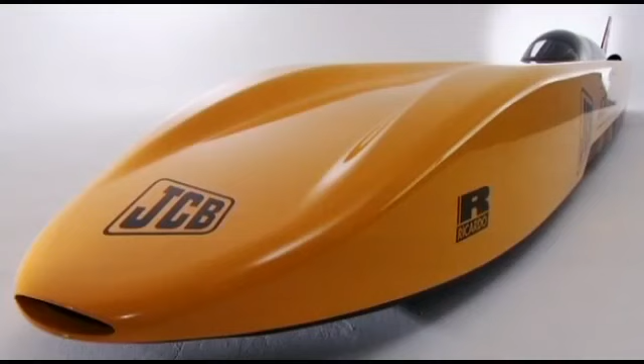Mathematicians are used to dealing with limits, but industrial vehicle manufacturer JCB wanted to push the limits to the extreme. They wanted to take their classic digger and turn it into the world's fastest diesel car. It was a seemingly impossible assignment, but a dedicated team of men and women, including engineering consultants from Ricardo, achieved astonishing success. This is the story of how maths made it happen.

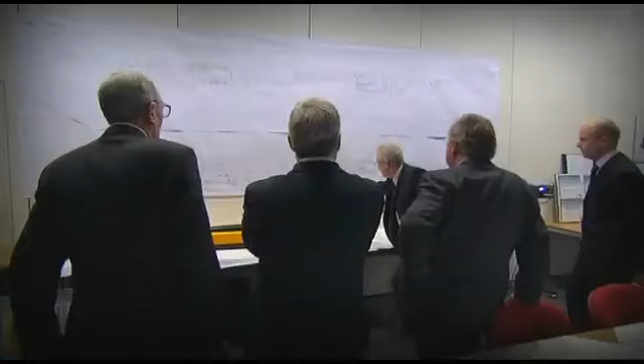My involvement in Dieselmax began when my boss called me in and said we've got an interesting project opportunity here. He described that it was JCB looking to take the diesel land speed record, and I honestly thought it was a wind-up when he first told me about it, but he was deadly serious. We had two weeks starting that day to do the very first level feasibility study.

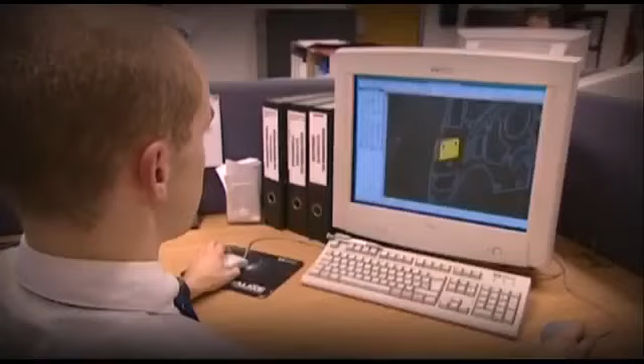This was to answer some key questions: how much power would it take to go 350 miles an hour? How many engines would it take to achieve that? And what were the critical vehicle constraints - vehicle mass, vehicle drag coefficient, frontal area, and so on.

We probably didn't show it was feasible at that first stage. We showed that it would be very challenging, but I think the key thing was we understood what was important.

Who better to drive the car than Wing Commander Andy Green? Not only is he an RAF fighter pilot, but having broken the sound barrier driving the car Thrust SSC, he is the fastest man on Earth.

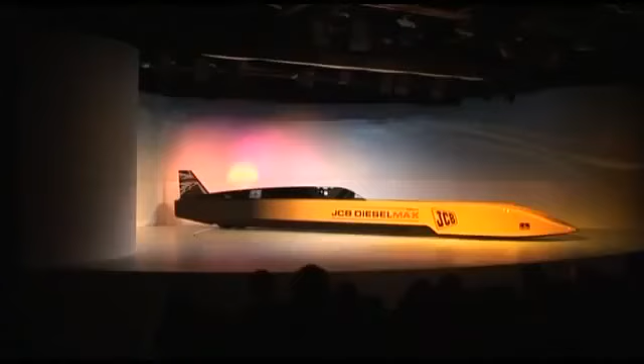Thrust SSC and JCB Dieselmax: challenging, exciting, very different ways. Thrust SSC solving the problem of what is the ultimate land speed record, trying to go supersonic. JCB Dieselmax is an entirely different challenge. We took two digger engines, put them in a car, and created the world's first 350 mile an hour diesel car.

Even if Audi had taken their racing diesels, that would be quite impressive. For JCB to do that with the support of Ricardo, and do it as a British project taking digger engines, is truly astonishing - in some ways more astonishing than what Thrust SSC did. Certainly from the engineering and hardware point of view, it's quite extraordinary.

How could that not be thrilling and exciting, particularly for myself as a fighter pilot proud of being British, as a mathematician who understands the challenges of the numbers to make that work? It was an extraordinary thing to be involved in.

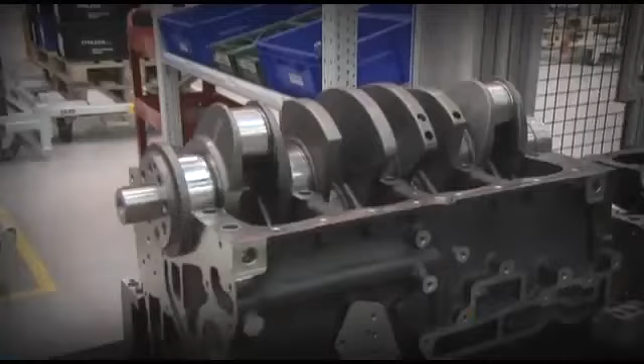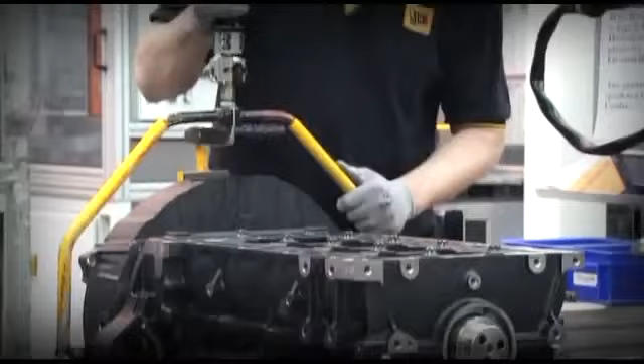If someone approached us and said we want to set the diesel land speed record, we wouldn't start with the JCB engine. Typically the JCB engine is what we call an off-highway engine - it's designed for products that aren't used on the road. It's designed for very long life, very high levels of durability, good levels of noise, low levels of emissions. It's really a very robust, high torque power unit.

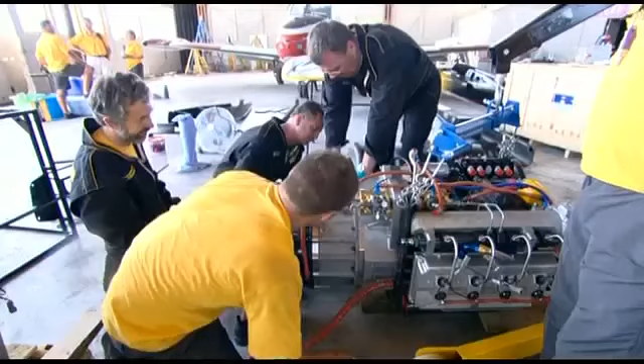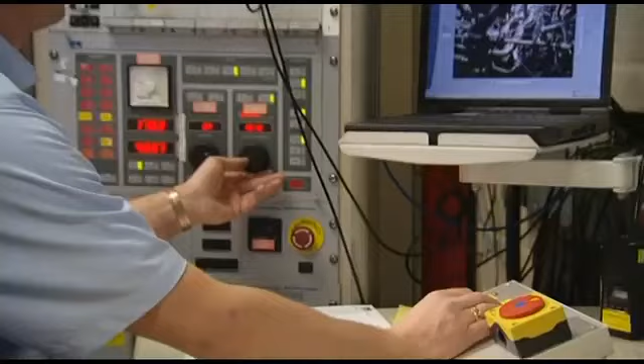A race engine typically would have a large number of cylinders - maybe a V8, V10, or V12 engine - but we had just 4 cylinders. So the loads that we'd be putting on the systems, the piston, the crankshaft, would be huge, and so we had to do a lot of modelling of how those loads would be managed and whether the structure of the engine itself would cope with this 6 times up-rate in performance.

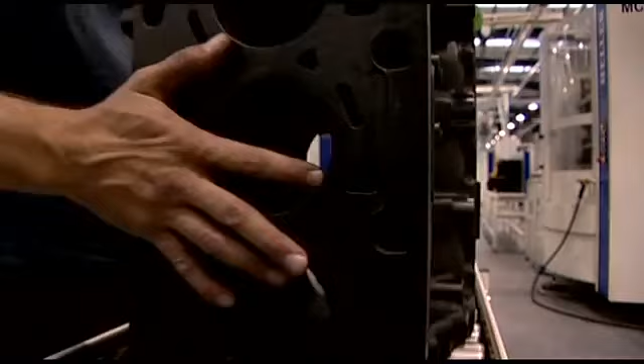The unlimited record for a land speed record is a blank sheet of paper - you can power it with anything you want to. The aim is just to go faster than anyone else has. How do we take the limited power of 2 JCB engines and achieve the highest speed? So the problem's almost upside down - you're now given the limitations and find out what you can achieve within them.

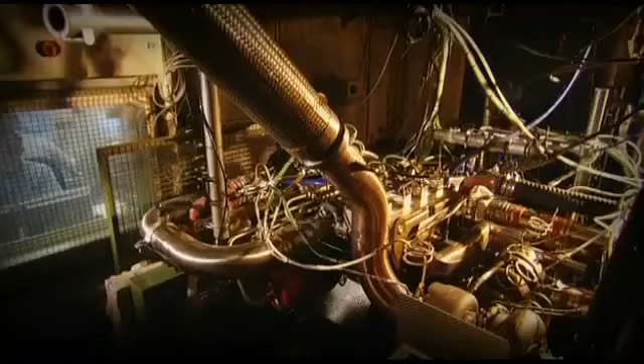Part of that was Ricardo's job in taking an engine and increasing its horsepower output by some 500%. Most people ask for 10 or 20% and feel quite pleased when they get it. 500% is an eye-opener. Using numbers: 200 bar of cylinder pressure, 6 bar of boost, pumping all 16 litres of oil through the engine.

Filters, the coolers, repressurising it, spraying it onto the back of the pistons every 5 seconds just to stop the pistons melting. And just to make it slightly harder, they've taken an engine that was built to work upright and laid it on its side. So a huge technical challenge.

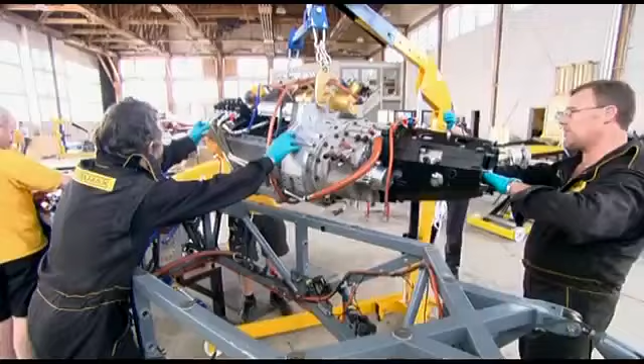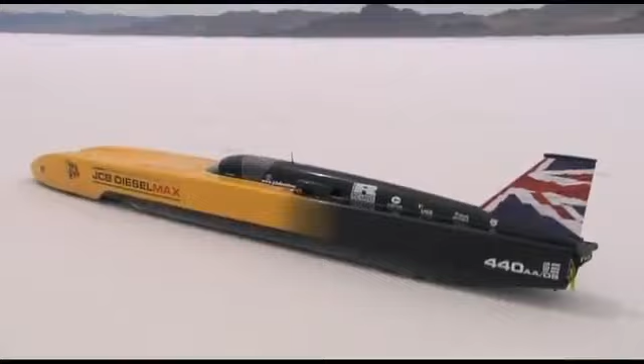People who say British engineering technology is dead, and we might as well just let the Japanese make all our equipment from now on - I'm sorry, they're wrong. It's when you have to push the design of something right to the limits. There is nothing to benchmark to start with, so you have to really do your analysis work to determine whether it's going to live.

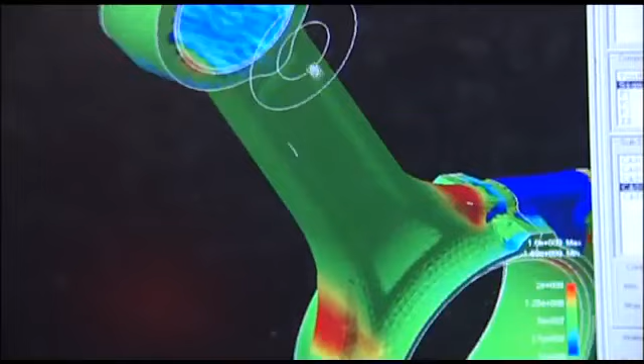The whole vehicle is only going to live as long as the components within it. So even if the smallest component happened to break, that's the whole thing broken because of that part. So everything has to be looked at. This picture here shows a connecting rod from the engine - the connecting rod is the part that joins the crankshaft to the piston.

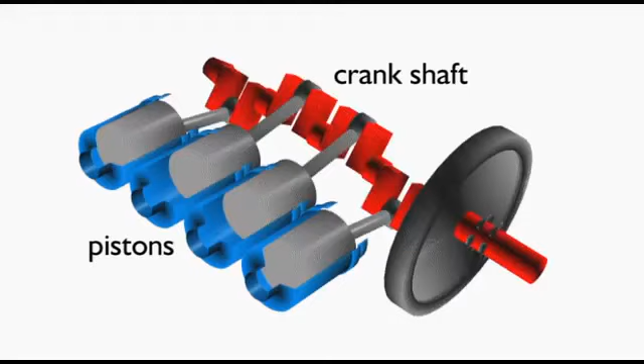The piston is what compresses the gas, and then under combustion that's forced, and the force is transmitted via the connecting rod to the crankshaft in order to turn the crank and create the torque on the engine that ultimately drives the wheels.

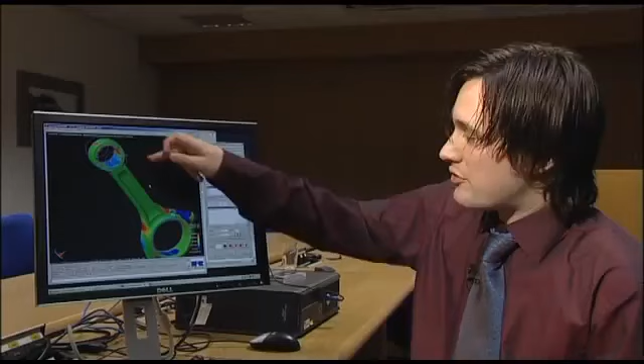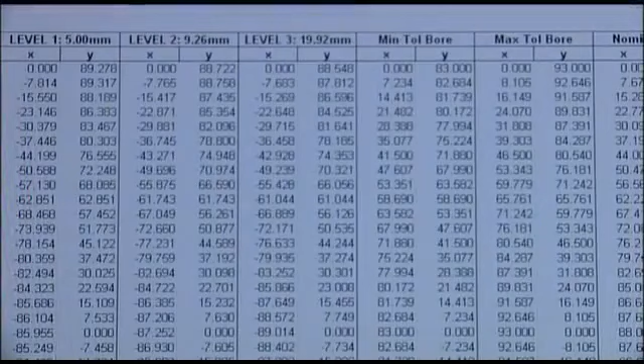This rod is taken into a finite element package and loads are applied to it at the big end, where it connects to the crankshaft, and at the small end. These loads are derived from the gas pressure, a compressive load that acts to compress the connecting rod. Equally, the piston has a mass which needs to be accelerated up and down the cylinder, and this is another load the connecting rod sees. It acts in the opposite direction at top dead centre when the piston is at peak compression - the mass of the piston is trying to stretch the rod.

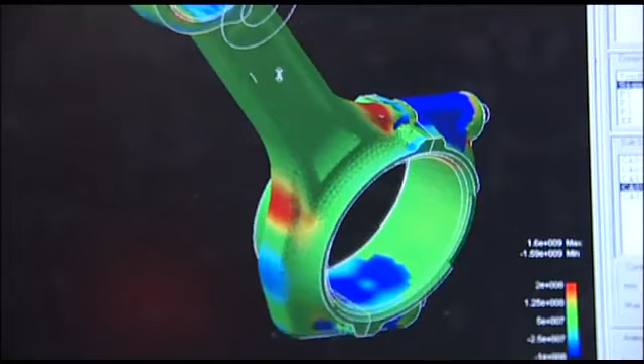Through the analysis, the stresses are calculated, and the different colours in this picture show the different regions of high and low stress. The red areas show regions of high stress, and blue areas regions of low stress.

One of the key problems identified as a result of this analysis was the high stress at the small end oil feed. As a result, this oil feed was moved and placed at the bottom of the connecting rod, feeding through the rod, which gave a much lower peak stress level and made the part more durable.

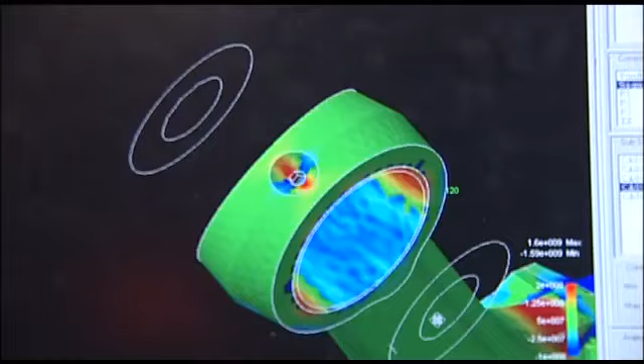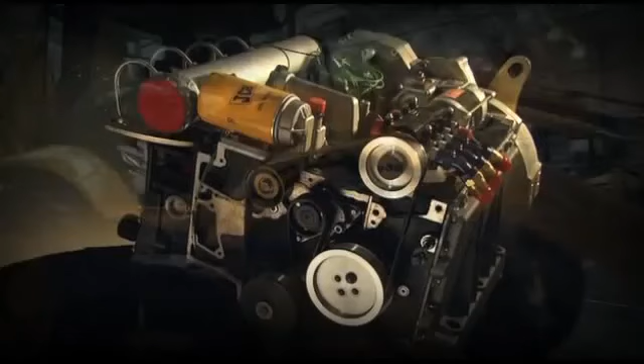Many of the components we used in the engine were standard production items, and it was a clear requirement from JCB that they should be standard. So when the man who drives a digger, a backhoe, for a living sees the Dieselmax, he can clearly see the engine in his digger is the engine in Dieselmax. They were modified internally, however, so where possible we removed unnecessary material to lighten it.

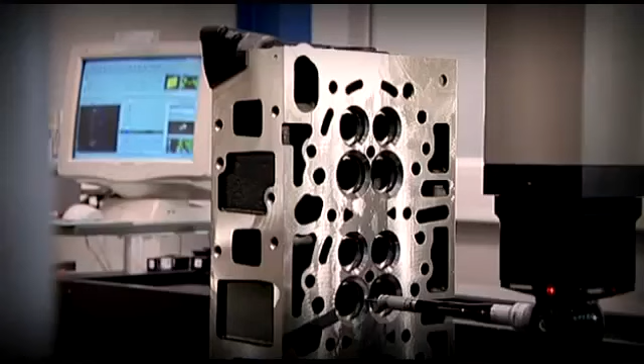We were always going to take the fully engineered approach and calculate everything before we went there and did it. We had to satisfy ourselves that it was safe and robust.

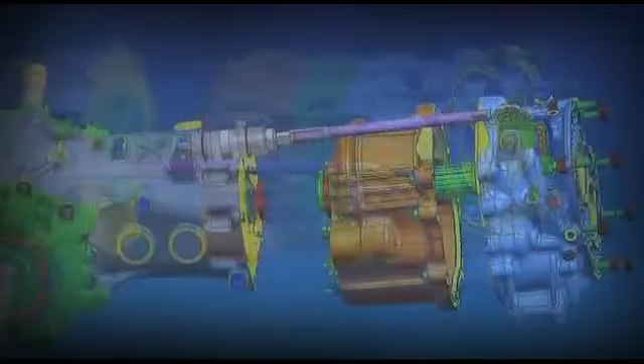The vehicle team spent a lot of time on that, using fluid dynamics to model the airflow around the car, and also vehicle dynamics modelling to see how the suspension would behave. We actually spent 8 months purely in simulation.

A lot of the time you have to write your own set of equations, or in some cases write your own short little programs. This is an example of a series of equations we had to put together to calculate the bending moment on the shaft in the engine in order to determine whether it would be durable. Trigonometry is applied in order to resolve the loads into the perpendicular directions.

The equations are assembled to work out the bending moment at every position along the shaft and at every speed that the shaft will run at. These equations are integrated to get the shaft deflections, compared against what the bearing can take.

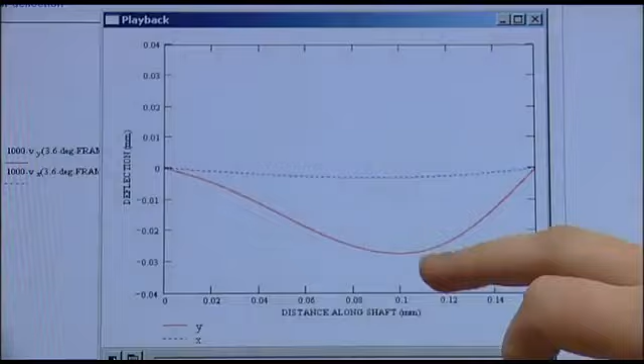You're able to look at how the shape of it changes as the shaft rotates, and you can look at this at various different speeds by changing the inputs at the beginning of the sheet. The actual result of the analysis was to choose to put 3 bearings in there instead of 2, which restrains the shaft better and reduces the peak deflections and the angular deflection at the bearings.

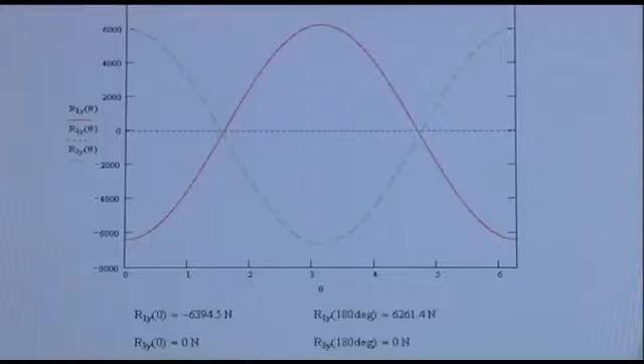A lot of the equations in this sheet are very simple - differentiation, integration, things you'll learn in secondary school. Engineering is learning how to apply that.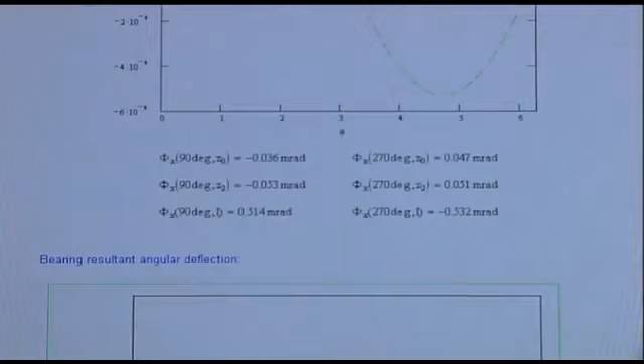The car design process is long and protracted and involves a number of elements, and the drivability is part of it. It's not race driving, it's test and development flying on the ground.

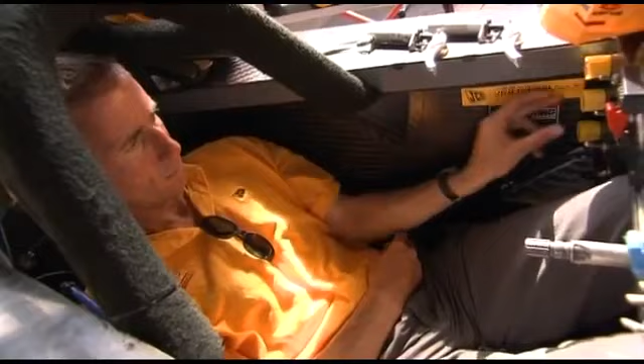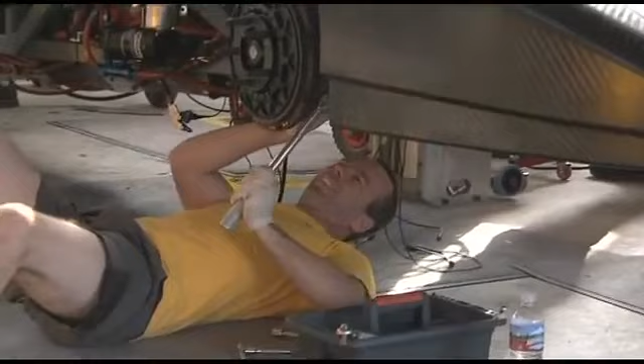That's something that, as a whole team - the engineers, the scientists, the materials specialist, the chief mechanic, and the driver - all have to work together to understand what each other can and cannot achieve, so that as a group you have a workable plan to research and develop this car, not kill the driver, not destroy the car, particular favourites of mine actually, and actually achieve something which no one in history has achieved before.

My enormous advantage in all of that process, as a mathematician, fighter pilot first of all, but before even that a mathematician, is being able to understand the science, the principles, and a lot of the technology and processes to make all of that happen. That gave me a unique advantage.

The driver was very, very important. Being someone who understands engineering, understands maths himself, he actually became far more part of the engineering team than just a driver. Very early on he got deeply involved in the project.

He came to our technical engineering meetings to understand the work we were doing. He came and saw an engine running on a test bench to get a first feel of what he was taking on, sitting in between 2 of these engines producing this huge amount of power.

Once we got into vehicle testing, it was really like having another form of data recorder in the vehicle.

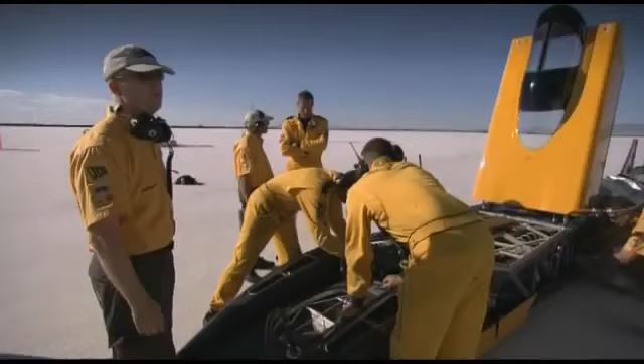We had control systems which would log lots of temperature sensors, motion sensors, all the critical control parameters, but we also had Andy Green's commentary that explained what we were seeing in the data. At the end of a run, we'd pull the data up on a big screen, lots and lots of charts, and Andy could get straight into that data, talk through it with us. It was far quicker for us to get that kind of understanding, having a technical guy at the wheel, feeling things as they were going on and having a grasp of what all the systems around him were doing.

One of the big perception problems about not just mathematics but the whole science, technology, engineering side is that it's very much a boys' preserve. It's all about cars and aeroplanes and science and spanners, and it's boys' stuff, and it's really not. The majority of the people you see working on it are because that's what society expects, but they really shouldn't.

An extreme example of being fundamental to the whole team on Thrust SSC: the run controller, the person to whom everybody else on the desert spoke. 30-odd people out there, 4 different radio frequencies, me being one of those speaking elements. We're all talking to one person who's controlling 200 square miles of desert, plus the airspace over it with our spotter aircraft. She is actually using the science of airspace and ground space management to make all of that work, fundamental to doing it safely and having people in the right place at the right time.

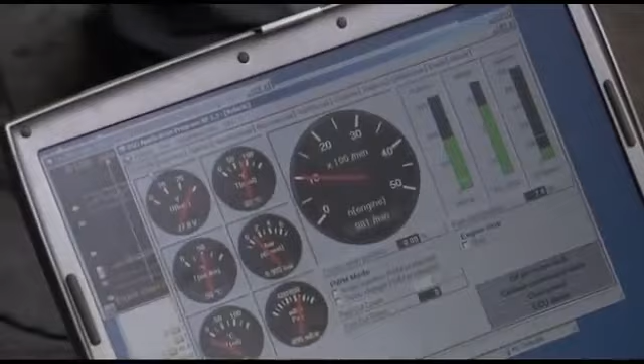Jump forward 8 years to JCB Diesel Max. A young girl in her 20s, graduate, motorsport experienced. She programmed and looked after all of the systems in the car, including the 2 flat screen displays I had in the cockpit. When we had an engine problem and couldn't get both engines to work together, we identified a different way of doing it. I needed more information in the cockpit. She brought out a laptop, typed into it for 10 minutes, and some new displays appeared that I used directly to get the engines on boost. She was pivotal to that. We could not have done it without her.

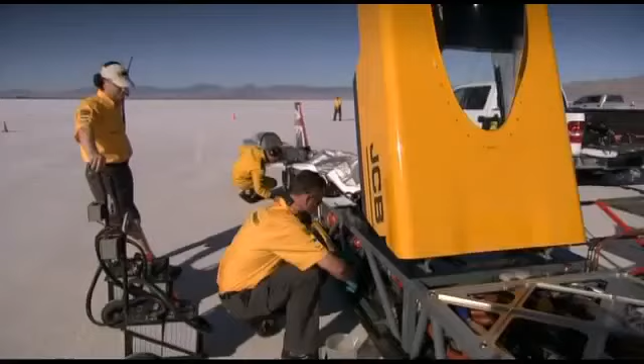I cannot understand when a 12-year-old schoolgirl looks at people like that and thinks engineering and science and maths aren't interested in them, or there isn't a place for them, because there really is. I think you need a very logical approach, a good level of common sense, and a good understanding of basic engineering fundamentals. The maths that goes with that is critical and essential, because for me, the maths I learnt at school, the more I've got into engineering, I've found how that's absolutely critical for a lot of what we do day to day.

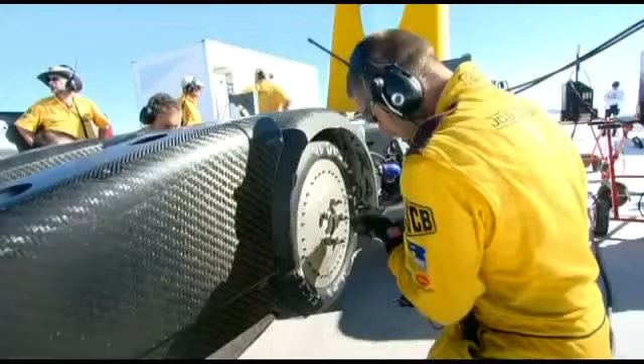I enjoy the fact that it's always another challenge. Every project we have is different, and the challenge is just to keep it moving on and on. We have to continually develop new solutions, new technologies to achieve these requirements.

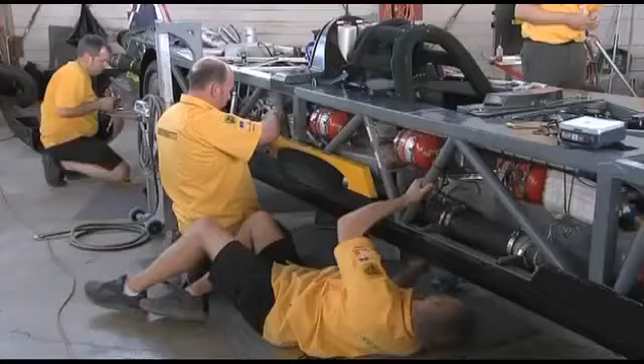Let's just find out what is actually possible given where technology is today. The British have done that with the land speed record incredibly well. What we need to do is take that culture and get it out to absolutely everywhere, so that we don't look back and say, well, we invented the Spitfire, the Harrier, the world's first supersonic airliner, the Concorde, but we don't do that anymore. Yes, we do. We really can, and we really should. We should be getting our school kids proud and excited about the chance to join in.

Personally, it was a brilliant project, my best project experience of my life. Biggest engineering challenge, biggest team challenge, and to be involved to the level I was and pulling the Ricardo team together that at the end of the day would deliver the engines that powered the vehicle to 350 miles an hour was just a fantastic experience.

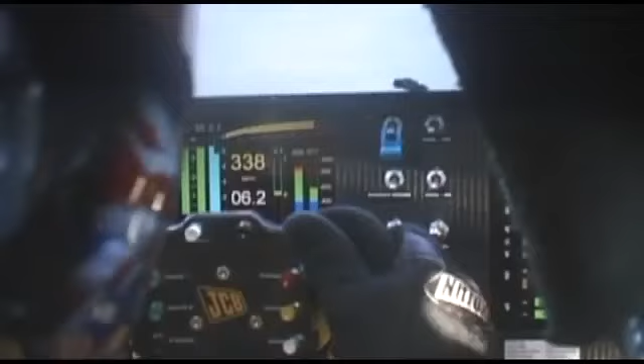Very, very hard work. All the team worked extremely hard the last few months of the project. There were very few days off, many long working days, but all our strengths and skills across the team came together ultimately to deliver the engine performance on the day that got us the 350 mile an hour target.

Perhaps the most remarkable bit of the story: I had to throttle back to about half throttle at 350 miles an hour because the car was still accelerating so hard. Suddenly we're looking at a car that has so much more to give.